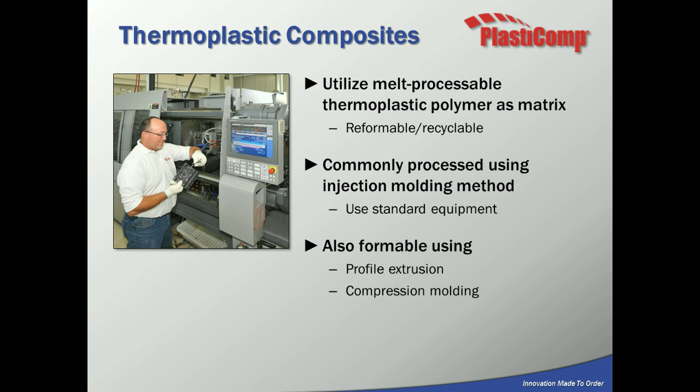So let's start with defining thermoplastic composites. With our process, we use melt-processable thermoplastic materials, meaning they can be melted and formed a number of different times, meaning they're recyclable. They're used commonly in the injection molding process, bringing advantages in structural performance as well as processing. They can also be used in profile extrusion for continuous profiles, including tubes and stock shapes, and in compression molding as well.

Reinforcements are a cost-effective method to increase mechanical properties of lower cost thermoplastic polymers. They can be incorporated into any thermoplastic polymer, but we typically see the biggest boost in performance with crystalline-based resins. Some reinforcement options are particulate fillers, which don't lend much to mechanical properties beyond stiffness, and short chop fibers, which have moderate strength and stiffness increases but don't lend themselves to toughness or impact resistance. If you're really looking for a reinforcement that increases stiffness and strength while improving toughness, long fiber materials or thermoplastic composites are the way to go.

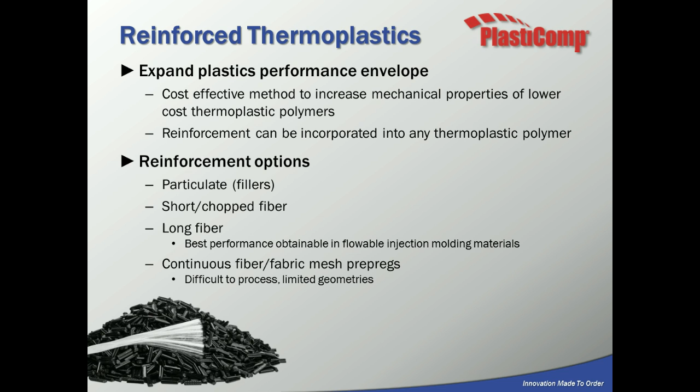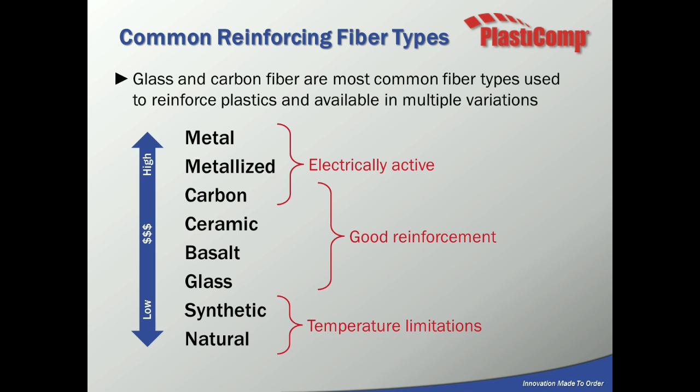There are also other types of continuous fiber and fabric mesh prepregs, but those are difficult to process and limited in geometries. Here are some of the different reinforcement fiber types, starting at the bottom with lower cost options that don't lend as much mechanical property boost. Where we'll spend most of our time is that center section, talking about glass and carbon. There are also higher cost reinforcements like metal and metallized reinforcements that make materials conductive, but we'll stick mainly to glass and carbon for today's discussion.

So what makes long fiber materials unique? Our materials are made with the pultrusion process. If you look at the bottom right corner of this slide, there are two pellets. For the longer pellet, made with a pultrusion process, we get unidirectional fiber alignment throughout the pellet. Also, the pultrusion process gives us the capability to fully wet out or coat those fibers prior to injection molding. That's important because coating the fibers protects them during molding and maintains fiber length in the final part, which leads to higher mechanical properties.

If you look at the smaller pellet in the lower bottom right, that's a representation of a short chopped fiber pellet. It's made by taking randomly oriented fibers and dumping them into an extruder with thermoplastic material, mixing them. That mixing process actually shortens those fibers, and you typically get less than, let's say, a 1 millimeter fiber length in the final part, which leads to lower mechanical properties.

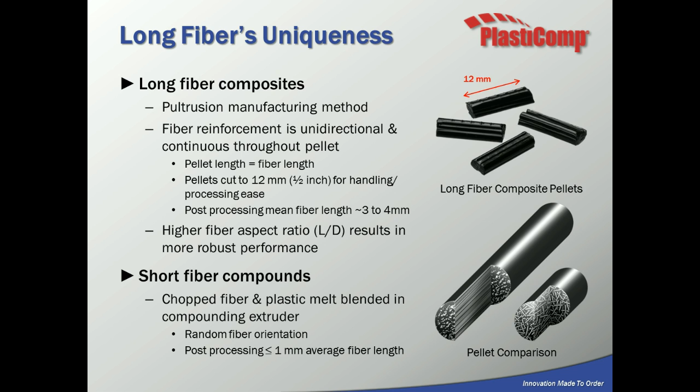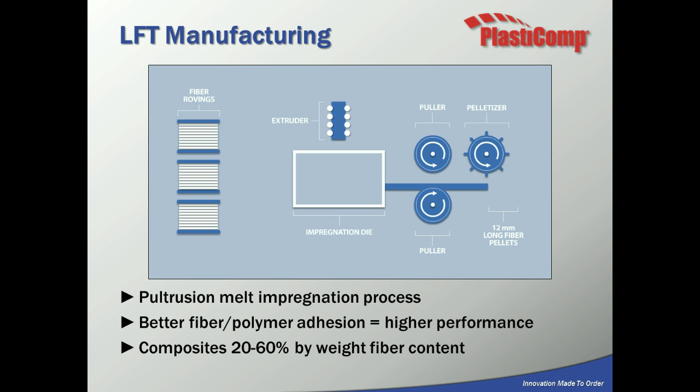Here's a representation of the pultrusion process. On the left, we start with fiber rovings pulled through an impregnation die. On top, there's an extruder or melt pump pumping thermoplastic resin in. The goal of this process is to coat the individual fibers, leading to high mechanical properties and better surface appearance. Those strands are pulled and brought to a pelletizer, which typically cuts our fibers to about 12 millimeters in length, optimal for injection molding processing as well as properties in the final part. Our composites can range from 20 to 60% by weight fiber content, depending on the base resin and fiber type we use.

So let's talk about the benefits of long fiber thermoplastics. First, stiffness. Stiffness is typically a function of the content percentage, whether it's short glass or other fillers, but you will see higher stiffness when using long fiber reinforced materials. Also, we can add design characteristics like ribs and gussets to further improve the stiffness.

Strength is again a function of content percentage, but you will see higher strength with long fiber materials in the final parts. Also, we look at part design and mold design to optimize those for alignment and orientation in the final part, with the goal of aligning those perpendicular to high stress areas, which again will increase the performance in the final parts.

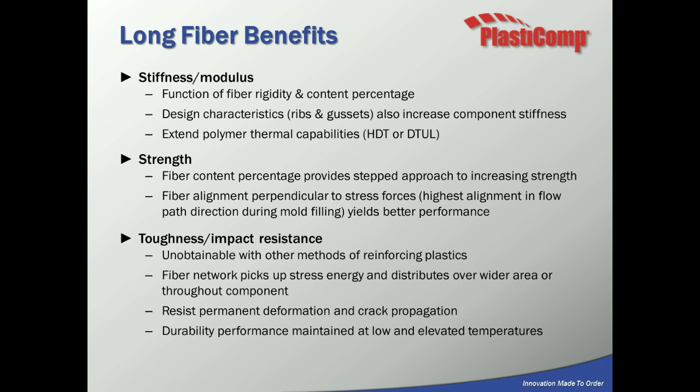And the final area that we're looking at is toughness, and this is where long fibers outmatch all the competitive reinforcements. With long fiber materials, you get high stiffness and strength, but you also get high impact properties. I'll show you why in a couple of slides. But again, unmatched impact properties in the final parts, and we see that toughness even at cold temperature impact, or at cold temperatures.

So here's a graphical representation of what we've been just talking about. Over on the left, we have a performance level, and on the bottom, we have fiber length. As you can see, as you move to the right, we get longer in the fiber length. As you start off on the side with the stiffness, you can see that stiffness goes up fairly quickly no matter what fiber length you start with. As we move towards the right and we get over 1 millimeter in fiber length and then beyond, we start to see increases in strength.

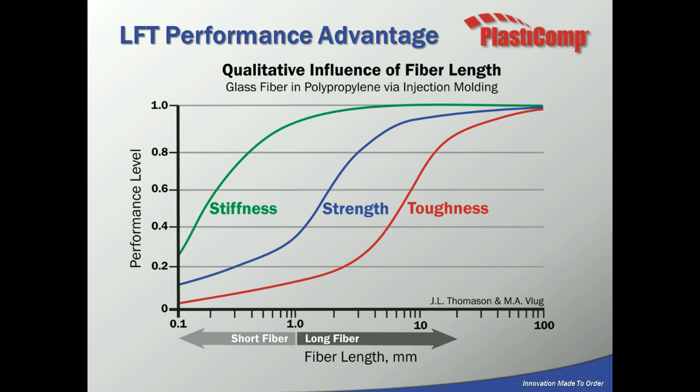And then as you go to the red line for toughness, you'll see that we need to really get into that fiber length of 7 to 8, upwards of 10 millimeters to get toughness. So again, this is where long fiber really shows its stripes.

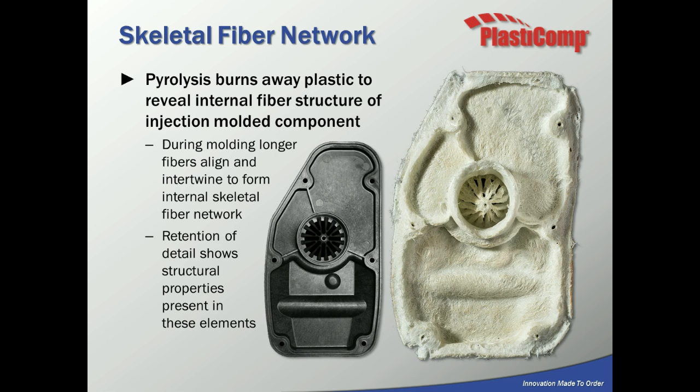So what are some of the other benefits of long fiber? Specifically mass reduction or light weighting. The high strength to weight ratios with long fiber materials make it easy to displace traditional materials like metal. They're more robust, so in a lot of cases we can actually thin the wall stocks down and use less material, which again lends to light weighting. They have great cyclical fatigue endurance, and they also have very good dimensional stability because of the low and consistent shrink. They have better creep resistance, and they minimize sink and warp in heavy sections.

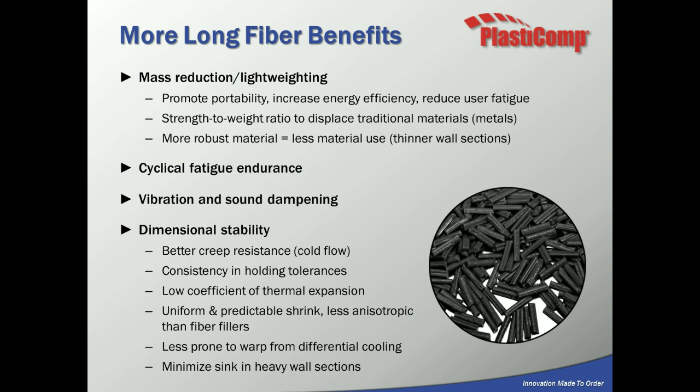So when we take a look at those properties, they make them ideal for metal substitution. The high strength to weight ratio combined with the injection molding process lead to an economical way to replace metals. What we find in talking with engineers and customers is that they choose metals because they're familiar with them. And a lot of times they're often overspecified. When we look at thermoplastic composites, we have to look beyond cost per pound or cost per kg. We have to look at the entire system's cost.

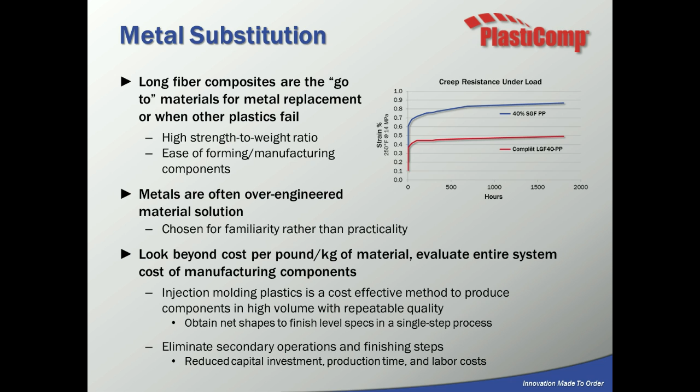We have to couple in the fact that if we use injection molding, we can combine parts into single parts. We have flexibility there to integrate design features, and we can reduce and eliminate secondary operations, reducing the overall systems costs.

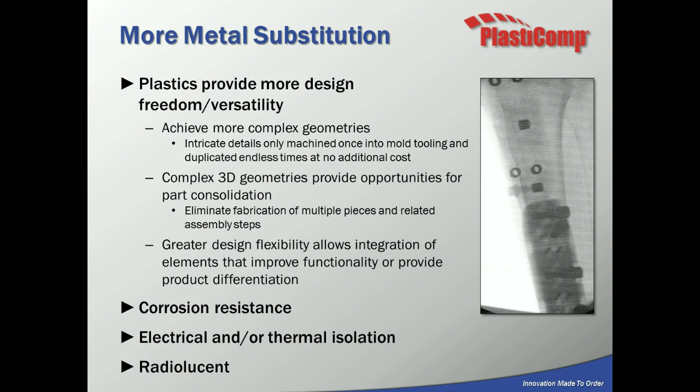As we kind of talked about on the previous slide, plastics provide design freedom where we can use complex geometries and give more complex design and put some flexibility into those designs. Along with thermoplastics, you get corrosion resistance and also electrical and thermal insulation. I should note that if we are using carbon as a reinforcement, which we'll talk about in a little bit, the materials will actually be conductive and not electrically insulating.

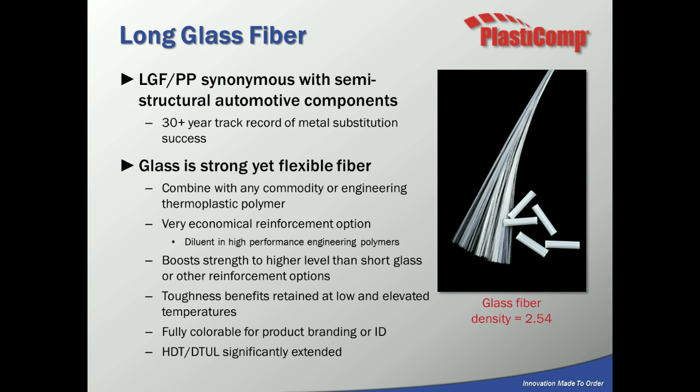So let's talk about long glass fiber composites. Long glass PP, or polypropylene, has been used significantly in structural or semi-structural components in the automotive industry for over 30 years. Glass is a strong yet flexible fiber, so you get stiffness and strength, but you also get toughness and impact resistance. This is true for the stiffness and strength at higher temperatures, so we get higher heat deflection temperatures under load, and it's fully colorable.

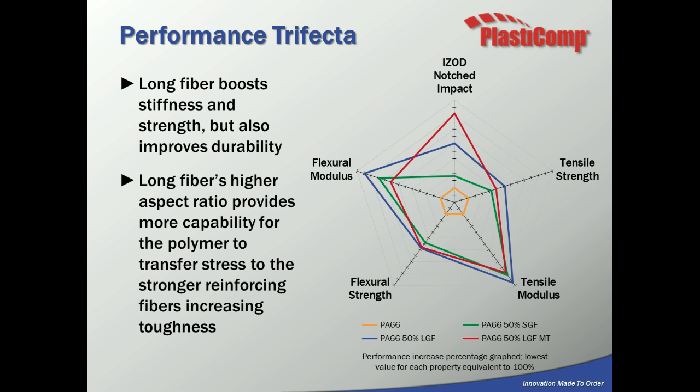So this is a spider graph comparing nylon 6/6 unfilled to short glass and long glass grades. If you look at the blue line, which signifies 50% long glass PA66, you can see it has the best balance of performance, whether it comes to strength, stiffness, and impact resistance, when compared to short glass materials.

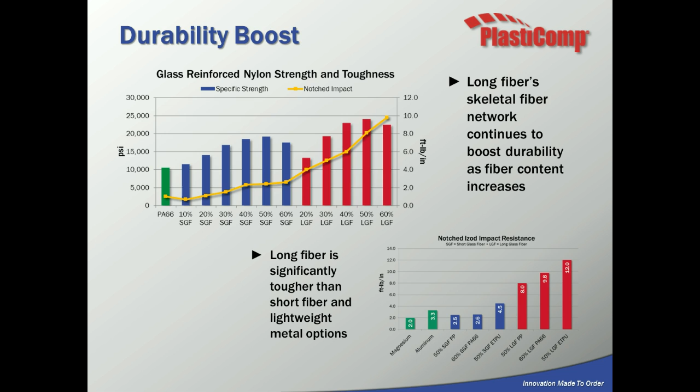The graph on the top here is just comparing short glass nylon to long glass nylon at different percentages. Where I want you to focus your time is over to the right, where we're looking at long glass materials. You can see they have the highest impact resistance, or notched Izod impact resistance, and also the highest strength. If we look into the bottom right-hand corner, we're comparing some of our long glass materials to lightweighting metals, specifically magnesium and aluminum, and you can see our impact resistance is higher than those metal materials.

So now let's switch gears and talk about long carbon fiber reinforced composites. Carbon fiber is synonymous with high performance. It's the pinnacle of performance in injection molded plastics. Carbon fiber is 30% lighter than glass composites and 50% lighter than aluminum.

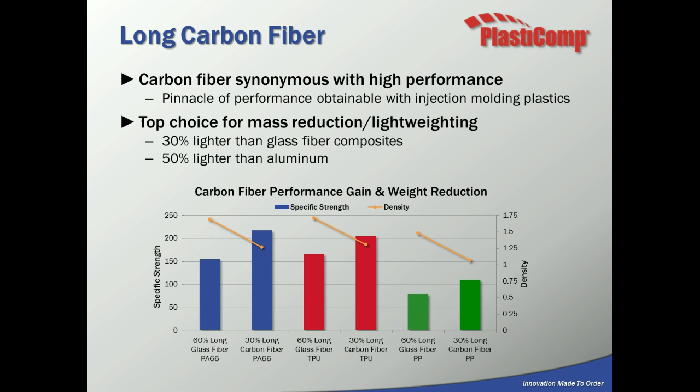Carbon fiber has been widely adopted in high-performance aerospace, defense, and sports and rec applications. It has a high-tech, sexy perception, which gives it a marketing advantage over other reinforcement types with consumers. The one negative on carbon fiber is that it can be a higher cost reinforcement, and that's why we have to look at that higher systems cost versus cost per pound or cost per kg.

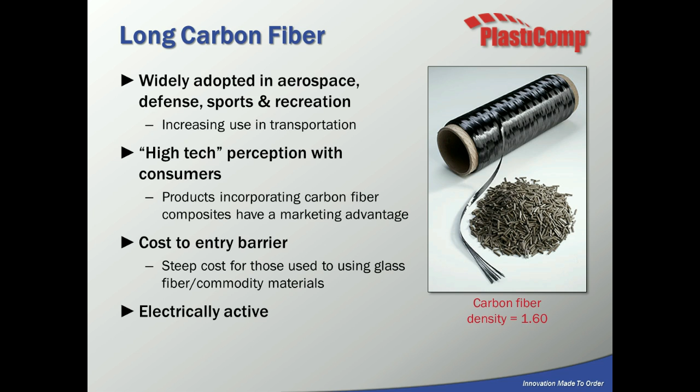Conductive materials: carbon fiber does make thermoplastics conductive, so they can be used in EMI shielding or anti-stat type applications.

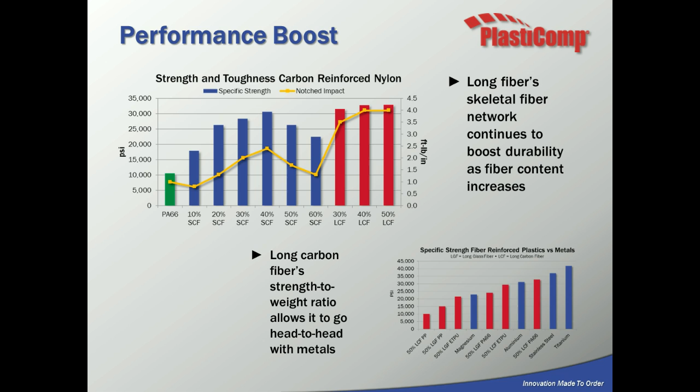If you look in the bottom right-hand corner, we're comparing long carbon fiber grades versus some common metals. As you can see, with carbon fiber reinforced thermoplastics, we actually have higher strength than aluminum and magnesium, and we match up nicely versus stainless steel and titanium.

So now let's talk a little bit about how we can further tailor the composite materials to meet application requirements. Again, as we said earlier in the presentation, we can use any thermoplastic resin, anything from a polypropylene commodity type resin up through engineering resins like nylon or polycarbonate, all the way up to high-performance materials like PEEK or polyetherimide.

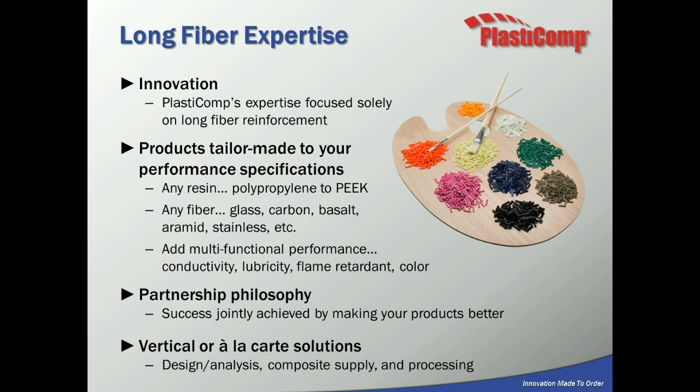We can use many different fiber types. We've talked about glass and carbon, but we also have basalt fiber, aramid fiber, and stainless steel. Aramid would be used in applications where you need wear resistance, and stainless steel where you need high conductivity. We can also add things like lubricants, flame retardants, and colors to further tailor the material to the application.

So let's talk about a few more specific products. First would be our hybrid glass and carbon material. This is actually where we put glass and carbon in a single pellet solution. What you get is a balance of property performance of the glass and carbon, carbon bringing stiffness and strength, and glass bringing that toughness aspect. Additionally, now with adding glass to carbon, we can balance out the cost as well.

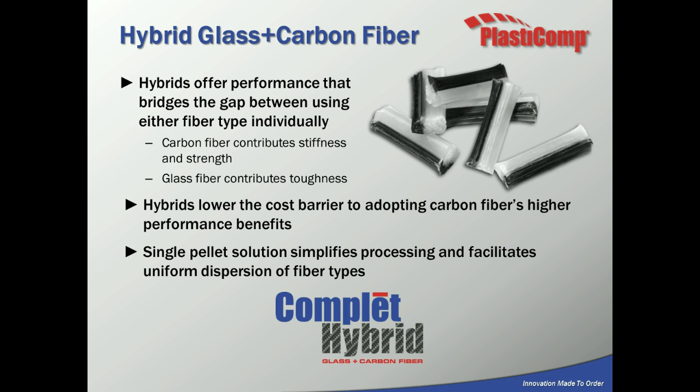As you can see, if you see the pellets up on the top right, the white portion would be the glass and the black would be the carbon. Now we can also tailor the overall reinforcement level, or the amount of reinforcement, and the ratio of carbon to glass to meet the application requirements.

This slide shows how a hybrid reinforced material compares to a long glass and a long carbon material. In this case, we're using 20% long glass and 20% long carbon hybrid material. Looking at impact resistance compared to a 40% glass material, we actually have 78% of the impact resistance, and we get 125% performance boost over carbon fiber.

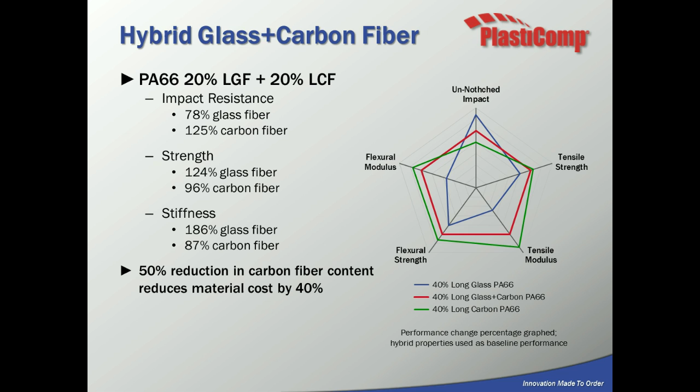When we look at strength, we get 124% of glass fiber, and we maintain 96% of the strength of a straight carbon fiber reinforced material. From a stiffness standpoint, there's a huge increase in stiffness with the addition of carbon, but we maintain about 87% of the carbon fiber stiffness with a hybrid formulation. So with a 50% reduction in carbon fiber content, we can actually reduce the cost of the material by about 40% as well.

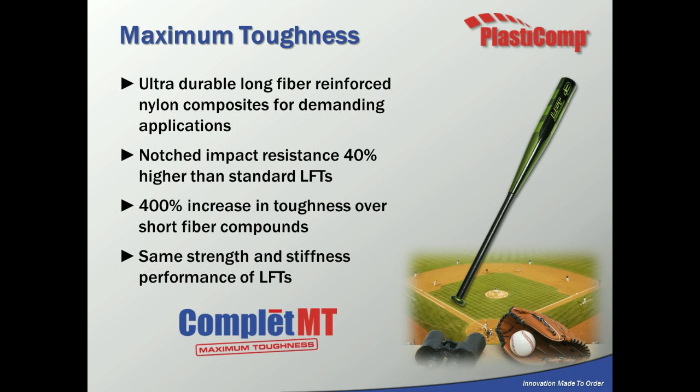Another grade is one of our maximum toughness grades, and this is a grade that we position in applications where they need high impact. A couple of points on this: we get about a 40% increase in notch Izod impact over standard long fiber thermoplastic materials, and we actually get about a 400% increase in toughness versus short fiber compounds. We get all this while maintaining the same stiffness and strength of the long fiber materials.

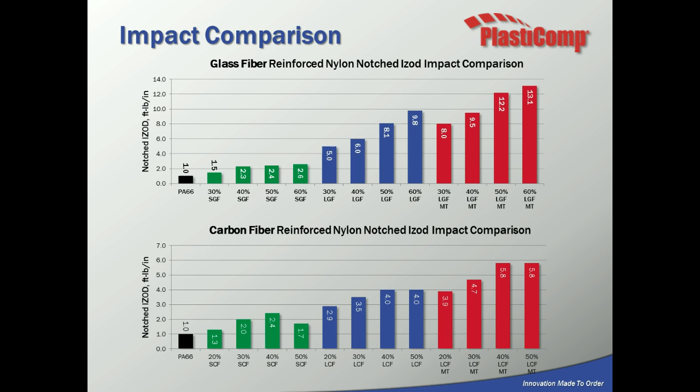Here's some impact data in comparison. Long glass MT products are on the far right on the top graph, and on the bottom we're looking at carbon fiber. As you can see, with the addition of the MT product, we get significantly higher impact values, and that's true in both the glass formulations and the carbon formulations.

One other product we'd like to talk about is our Velocity product. This is a product used in applications that need high or very good surface appearance. Typically, you get better surface appearance with long glass materials or long fiber materials than you do with short fiber materials, and that's because there's less fiber ends in those products.

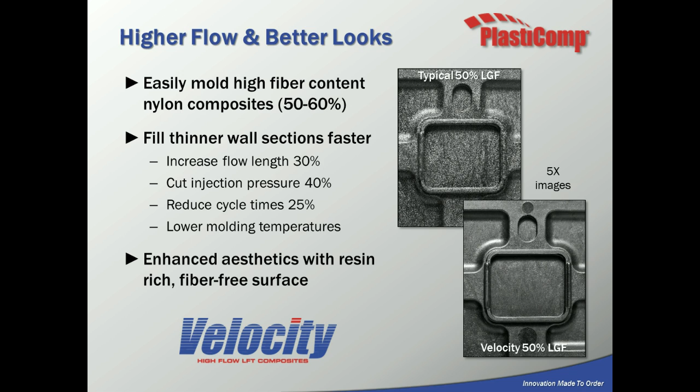But if you need to further improve it, we can go to a Velocity grade, which is a higher flow grade. It can increase flow lengths by 30%, cut injection pressures by as much as 40%, and may allow you to lower molding temperatures, which can reduce cycle times by 25%. If you look at the bottom right-hand corner, that's our Velocity grade at the same processing conditions compared to standard long glass materials, and you can see there's a big improvement in surface appearance with this product.

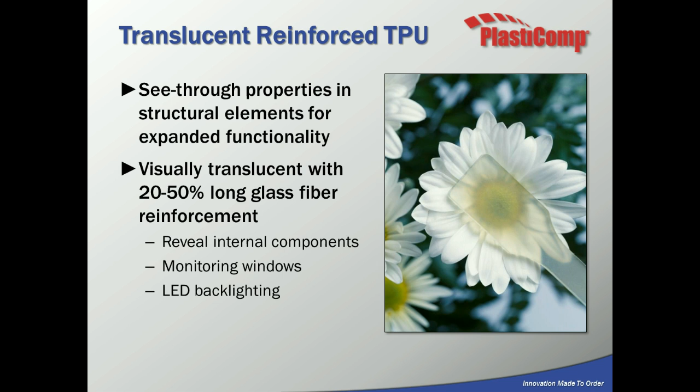One other unique product I'd like to highlight is our thermoplastic polyurethane, and this is a translucent grade, where we can load the material with 20 to 50% glass reinforcement, get a structural type material, but also have it translucent. So we can use it in components where you want to reveal internal components, such as housings, monitoring windows for fluid levels, and in some applications, LED backlighting.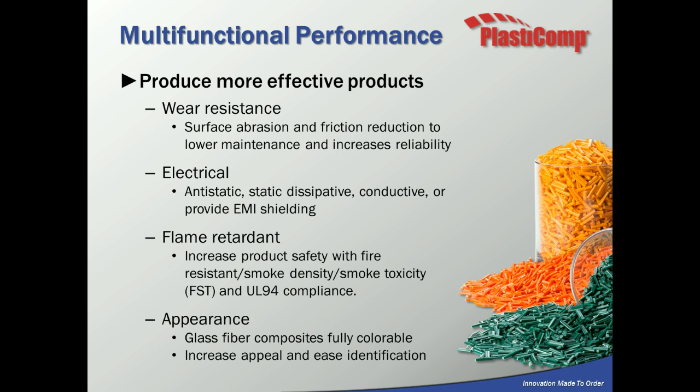So again, we can incorporate multifunctional performance through the addition of additives like flame retardant agents and lubricants for wear resistance on top of our long fiber thermoplastic materials. So let's talk a little bit about PlastiComp.

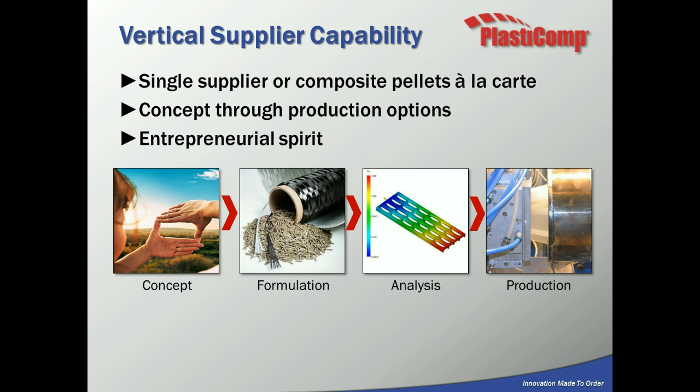We're different than other material suppliers. Not only do we provide the material solution, but we also partner with our customers and engineers to take it from design concept all the way through formulation, FEA analysis, and mold filling analysis to prove out the concept, and then in some cases prototyping and actual production. So as other companies may not be adding resources, we do add resources to try to help and support our customers.

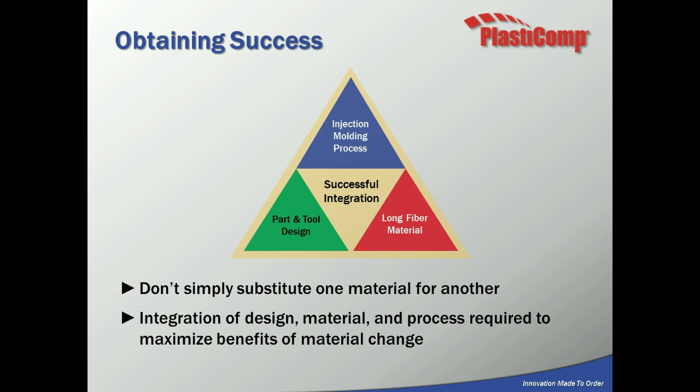When we look at developing applications with our customers, we use this approach where we work with part design, injection molding or different conversion processes, and fiber technology to really give our customers a solution that will work in their application.

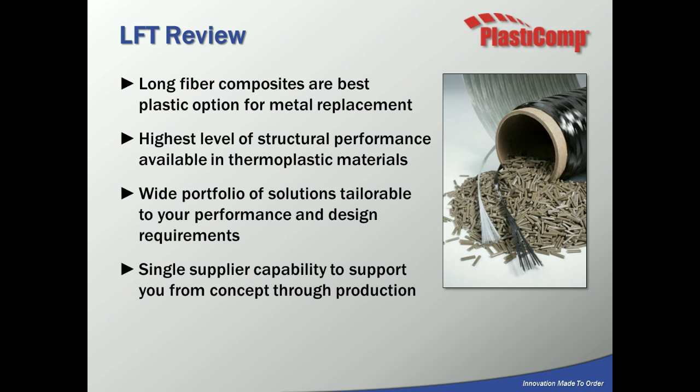So now I'd like to summarize what we've talked about: long fiber composites are the best plastic option for metal replacement. They typically have the highest level of structural performance available in thermoplastic materials. PlastiComp has a wide portfolio of solutions tailorable to your performance and design requirements, and we allow for a single supplier capability to support you and your concept through production.